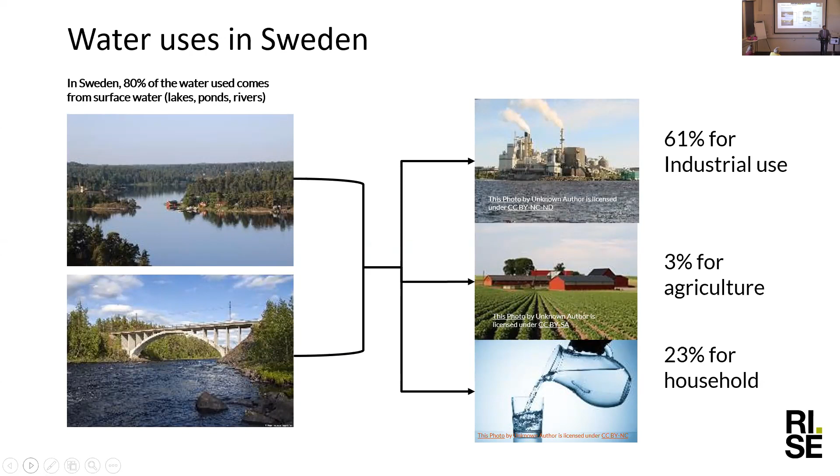And if we compare this with other areas in the world, we'll see that Sweden is the area with the biggest usage of water for industry - more than Northern America, more than Europe. And compared with other countries where agriculture is a lot more important, that also means it will not be the population, it will not be the agriculture that should drive the question here in Sweden. It's the industry that has to do something.

As you probably know, water is not everywhere. So when we speak at country level, that doesn't mean that all the country has the same amount of water. There are dry areas in Sweden, and there could be some local issues, even in such a rich country, let's say in Sweden.

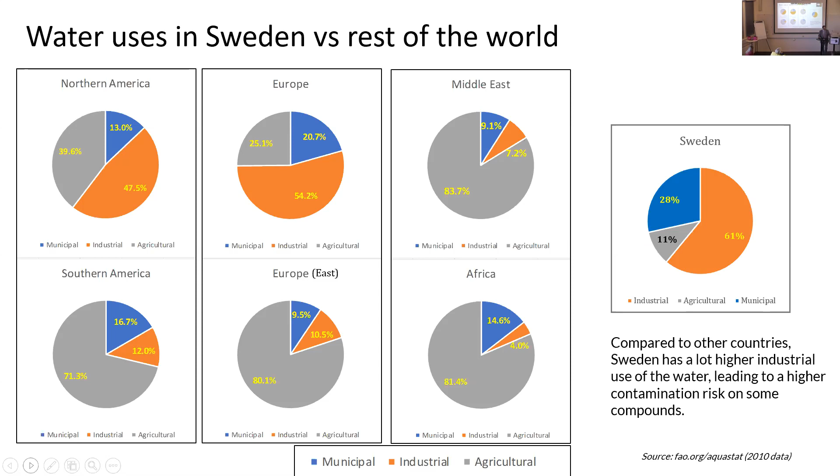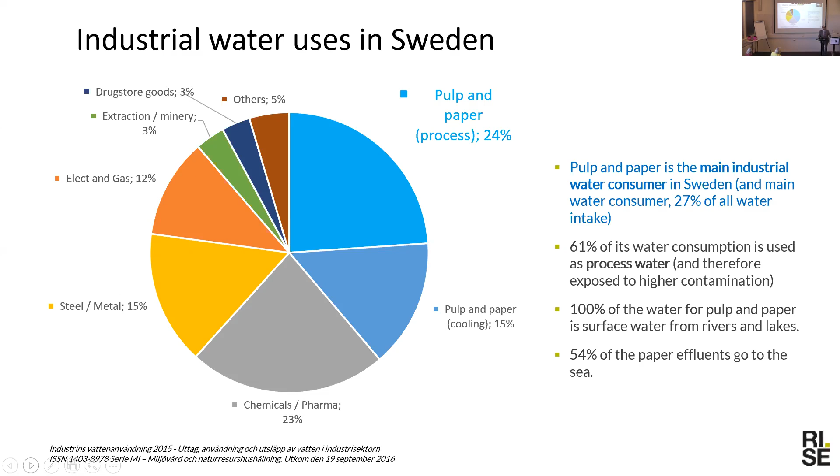And that's what I will try today, trying to simplify the concept to explain how maybe this can be done, and how we together—and when I say we, I speak about the water treatment companies, the research institutes, the paper mills—we have to work together on that.

What has happened if we look at the paper industry in Europe? Between the 90s, there was a huge effort. I'll explain this graph slightly—what we see here is that the production of pulp and paper increased extremely, but the water consumption was decreasing.

So until 2006, there was a big effort from the pulp and paper industry to reduce water consumption. But what has happened since 2006? There was a big paper crisis in 2005, 2006—printing paper saw a big decrease, so production was not increasing. But it seems that the efforts on saving water were not continuing either. It was like we pressed the pause button, and for more than 10 years there has not been a clear, or at least a visible, effort in saving water in the pulp and paper industry.

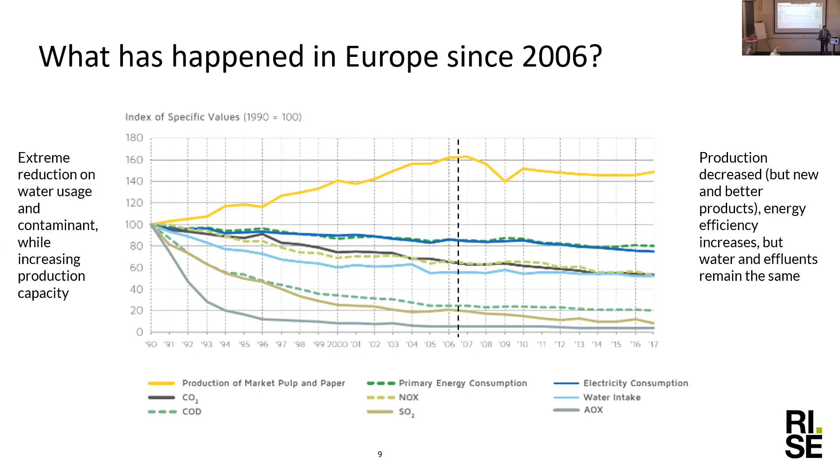Why is that? How can we change this? First of all, we have to understand the needs. And when we think about the needs, it's not only the lack of water or the drought—it could also be problems with incoming water quality. We can also think about seasonal variations that can mean that at a given moment your incoming water is changing a lot, or changes in legislation.

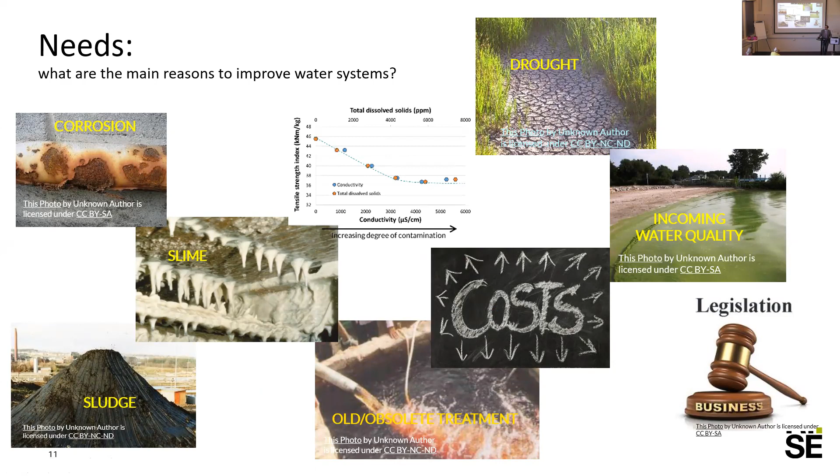We were discussing this during breakfast—a change in legislation can come suddenly and we are not prepared for that, and that's when urgency comes and maybe some bad decisions are taken. It could be costs, efficiency of the processes, or other related problems like corrosion or slime, which is well known in the paper industry. It could be that the water treatment plants are obsolete, or also the sludge—every time we speak about water, we have to think about the sludge, about what will happen with the rest of things.

But then we go to our customers at the paper and pulp mills, and they don't want to speak so much about water directly. Water is more a problem for the environmental guys. So how can we speak with the production manager? How can we speak with the deciding people about water and what they have to do?

So first of all, we want to understand what are the costs of water. The first cost is directly linked to the water—we call it the water usage and water usage cost. That means how much you pay for treating your water, how much you pay for the water you take, how much energy is directly linked to water. So those are costs that are relatively easy to identify. But what we will see is there are a lot of water-related production costs that have to be identified in order to capture all the costs that are really linked with water management.

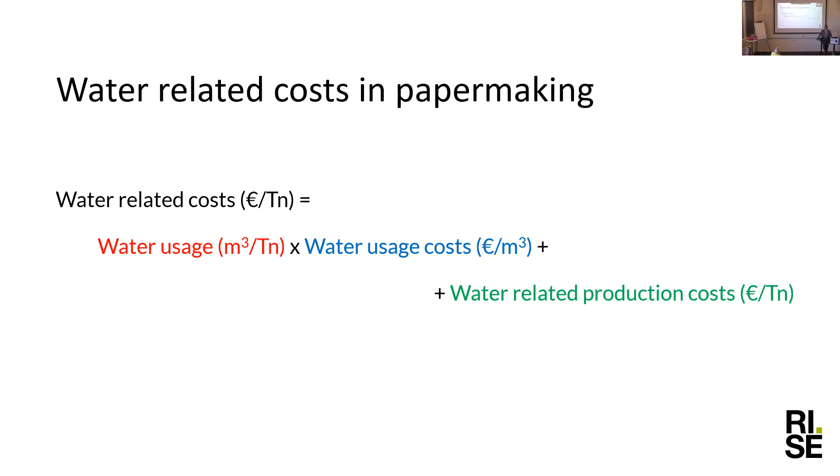So we want to change the perspective a bit. Many times we speak about the specific water consumption or the amount of effluent, but now we have to see how water is used in each of the different units in the process. That is where we have to understand the cost.

Going and defining at the different levels, there is one thing that surprised me a lot: the concept in Sweden that water is free. First of all, the surface water is shared with agriculture and with the cities, so that doesn't mean there is free water for everyone. Every drop of water the industry takes from the surface water could be used for something else. Secondly, even the fresh water is not so clean, so we have to clean it.

So already from the beginning we are adding several costs. I had an interesting data point from the UK paper industry, where the cost of freshwater treatment and effluent treatment can go up to 15 pounds per ton of produced paper. That won't be the biggest cost, but now we're speaking about some real figures.

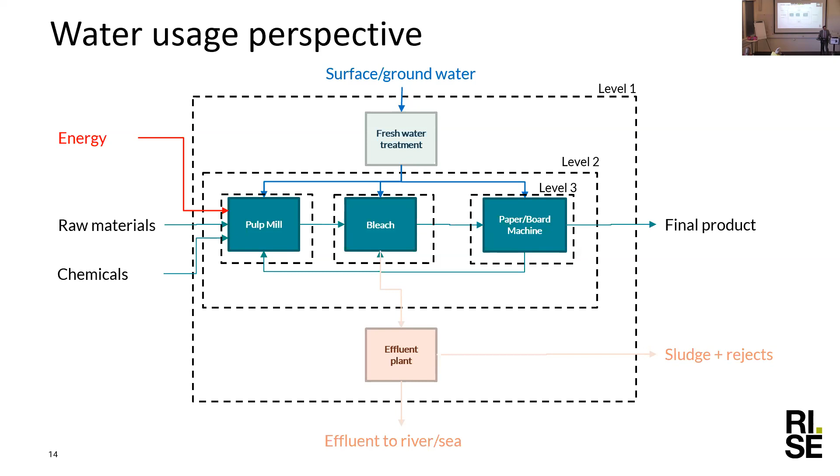As I said, the water-directly-related costs are easy to identify. Let's try to go to the non-visible costs. The first thing I want to discuss is the chemistry - what happens when we reduce the water consumption, for any kind of contaminant you choose. You will always get an accumulative effect.

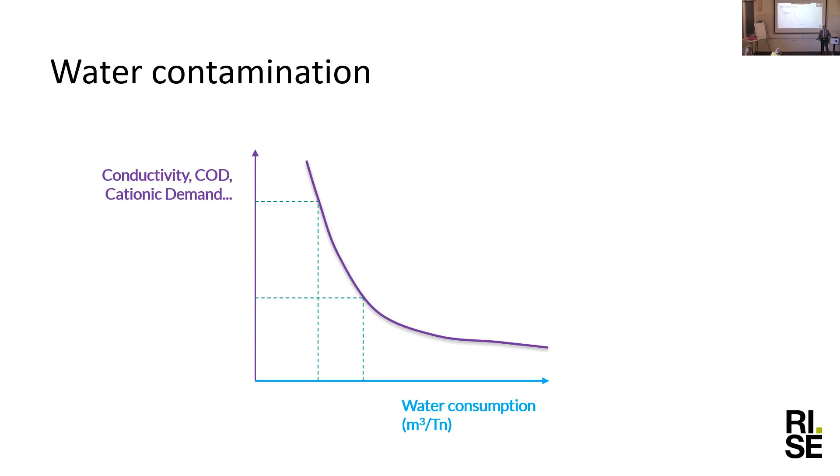That means we will normally be operating at a given level, but there will probably be a maximum that can be achieved. So we will have one curve for each different contaminant.

What is driving this curve in pulp and paper making, and what defines the maximum we can achieve? Normally these curves depend on the pulp type, the water quality, and all the additives we are adding during the process. So it can be sector specific, but it could also be generalized, and we can find some of these correlations. But that will not be enough to convince people.

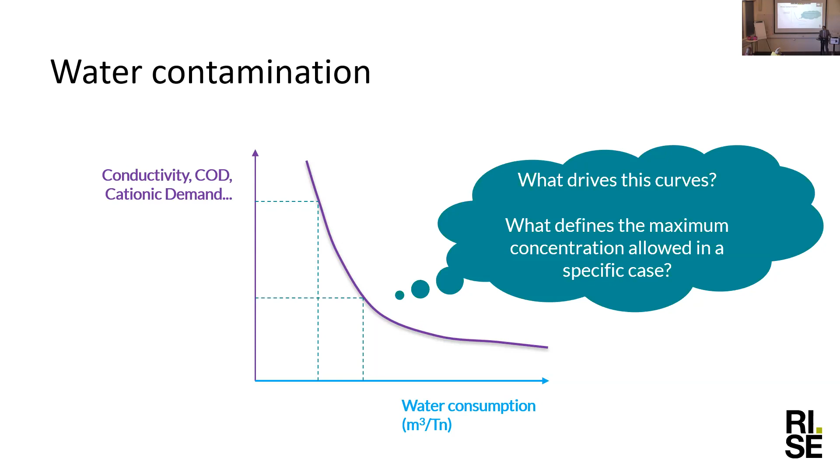If I go to a paper mill and start speaking about COD, maybe I cannot manage to get their attention. So let's take these contamination parameters to the x-axis, and put process-related problems on the y-axis.

We can speak about the consumption of a chemical, the risk of precipitation in a refiner, or the time needed for dewatering and therefore the productivity. And therefore we get a given curve. These are completely invented curves, so please don't take this literally - what's important is the shape of this curve, and what determines its levels.

Then we move closer to the process itself, to the equipment itself, and that's when we need input from the different partners and stakeholders in the water industry. That's where we think RISE can add value - we know about water, but we are not selling technology or any kind of treatment. We know about the papermaking process and the pulping process, so we can understand the impact of a given degree of contamination on the process itself, and make these links to create these curves.

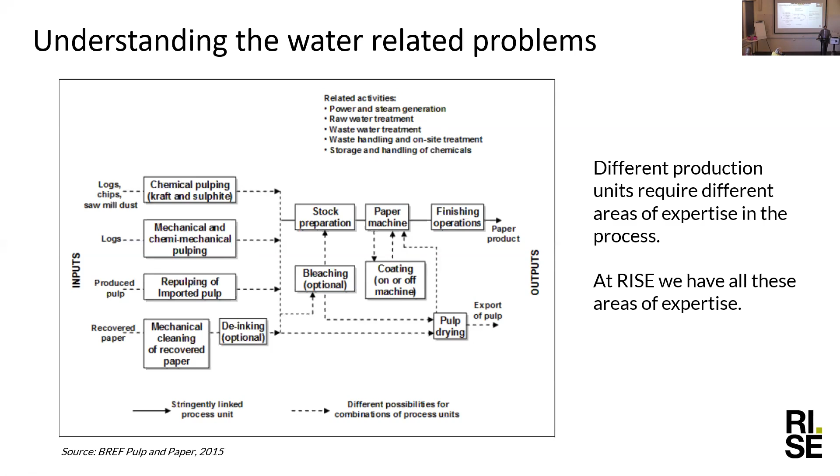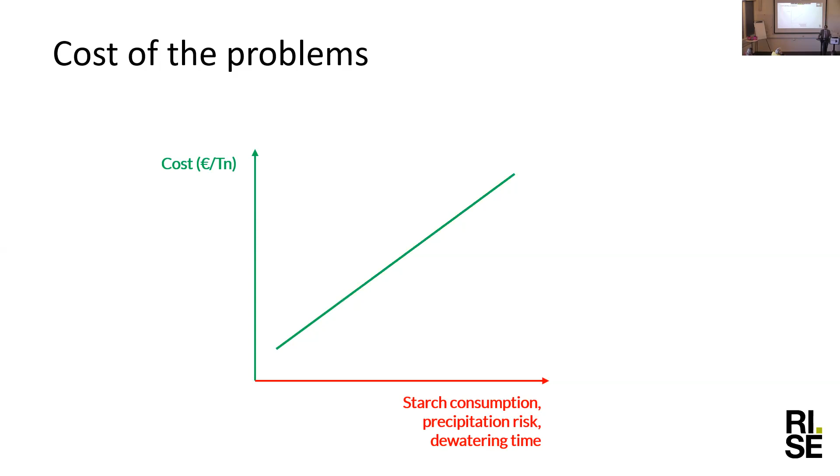The third curve, which maybe isn't for us to define, is when we take these problems and relate them to cost. That's probably more on the mill side, where they can make this connection. But often it's quite a linear relationship - the more problems you have, the higher the cost.

So the exercise will be simple. If we take the three curves we've been discussing and put them together, we can define the production cost related to a given degree of water consumption. And if we take these two levels - that's where we are normally working, and that's the maximum.

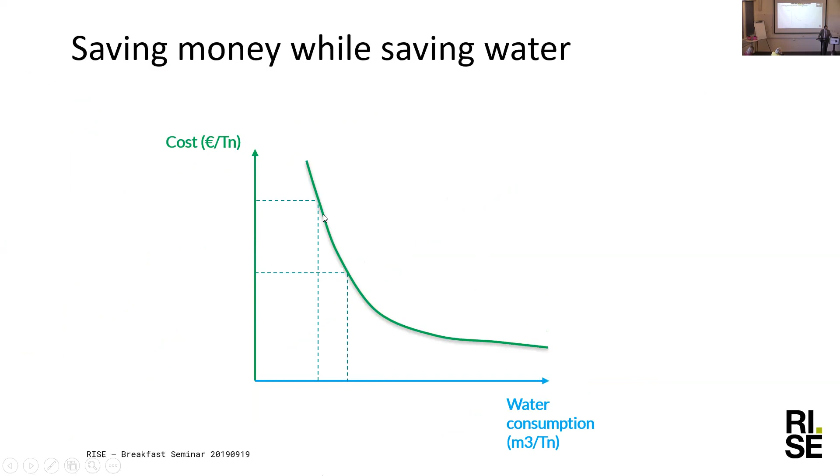What will happen if, by cleaning the process waters, we can get to a different curve? Then we can save money for the same water consumption, or save water for the same cost, or do both. That's the title of the presentation: saving cost at the same time we are saving water.

I wanted to add one additional parameter that is very important to consider as a cost in a paper mill. Normally when a mill is working, the machine is clean, and as the production process advances, we reach a level where we need to stop the machine to do a cleaning or something else, because continuing to produce will affect the product quality and the cost.

By changing to another curve, by decontaminating the circuits, we will also increase the time it takes to reach this level, so we can even increase the production runs. There will be an additional benefit from this decontamination process.

How can we do that? I will go back first to the other curve, because now it will be, we can say, mill-specific or case-specific. It can be a factory with a very high water consumption, and they will feel that they are quite far away from the benefits you get here.

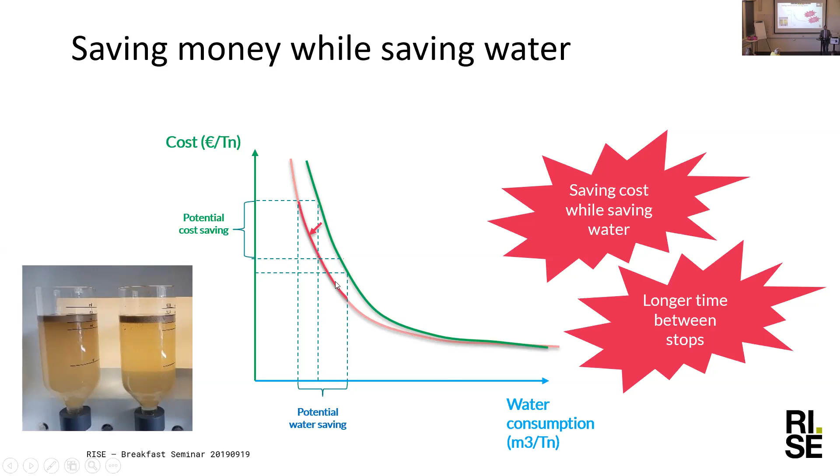But we have said already, considering we are in the 21st century, that sustainability is a must. We cannot allow, as paper industry, being the maximum individual water consumer. We cannot accept staying here, but we need to show the right way to move up to this curve with the minimal impact for the factory. As I always say, we cannot start building the house from the roof. There are some steps we have to do before thinking about decontaminating.

We have to use the right amount of water in the right place. That's what we call water management, understanding the quality. Then we have to start closing the water loops, which are opportunities to directly reuse the water. Only then is it time to think about internal treatments. That's very logical, because water treatment cost increases exponentially as we go to higher needs, so it's nonsense to install internal treatments directly when we have to treat twice the amount of water.

Just a comment: this graph is a real case scenario from Holmen Paper in Madrid.

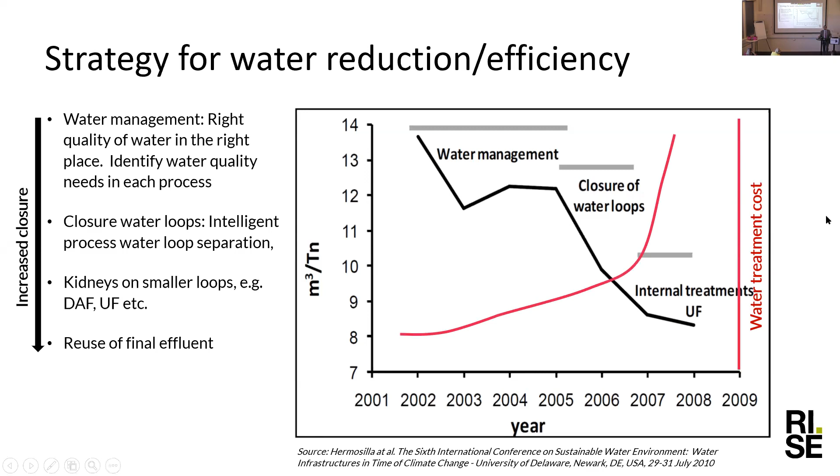That's what we want to suggest as a strategy, and as we said, not only for this, it's a strategy, a mindset for the industry. First, take water quality management, defining the problem, identifying the specific risks in the different operating units, characterizing and understanding it. Secondly, rethink the process, rethink the water loops with the help of simulation tools, to evaluate the potential of the different alternatives we have. And finally, test these curves.

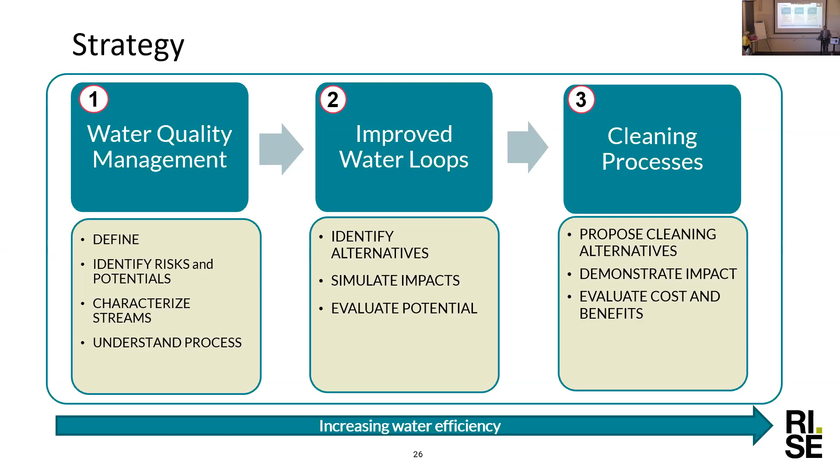But thinking about this accumulation curve, that's something that can be done at lab scale, at least to identify the potentials. And then is when, and I give the word to my colleague from IVL, we need the water treatment companies to make this feasible.

In my experience, since 2006 there was very little effort, but that's not the case for water technology. There has been a lot done on water cleaning during these years, which means that what was economically unfeasible maybe in 2006 now looks quite different.

So we really need to show that it's not only possible to clean the water and that cleaning the water leads to benefits, but also that cleaning this water is not as expensive as we tend to think. Thank you very much.

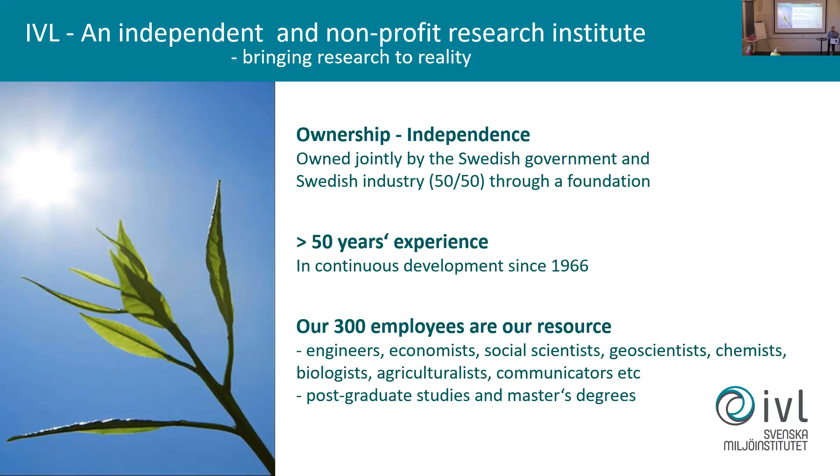And also we work quite intensely with EU projects. I'm a coordinator of one Inspire Water project that also aims to save water in the industry, and we are working in this case with Sandvik.

Why do we go abroad? Why do we try to? Because we think, to be true, on the global scale we are a really small country. We are half the population of the biggest city in the world. So our chance to make impact is to try to be in the front and show that it's possible to do developments in the environmental area. And that's also true for water. Even if we have a lot of water, we could make impact by showing how we could reduce the consumption. And if we are successful, there will be a huge market for those technologies and systems. So we should try to be in the front.

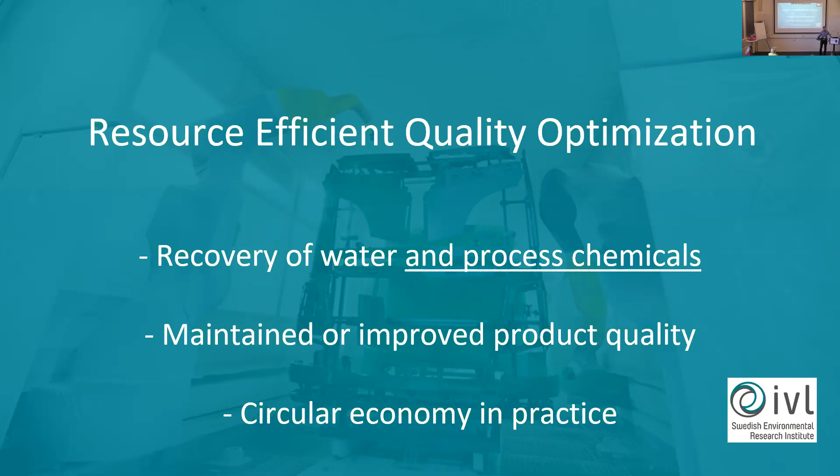So today, very often you see abroad, but in Sweden we have started to go more close to the processes. In the beginning, when we started at IVL in the 80s to introduce separation technologies, we found out that if you go end of pipe, after you mix all the effluents and try to bring out the impurities, you will have a very complex water. And that means that if you introduce more sensitive separation technologies, you're going to have problems. So what we learned was that we should go as close as possible to each process in the industry and put the separation technologies into the processes.

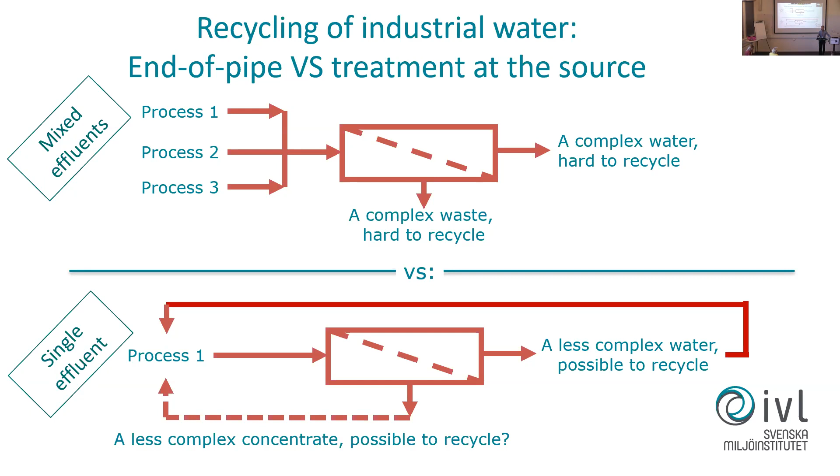And that's true. Here is one example where we have been working with both Scania and Volvo in different projects. Phosphating is a process where you take the steel plate before you paint the cabin or the car. You have to clean the steel plate, and you have to introduce a phosphate layer that is a corrosion inhibitor, but also a very good surface for the color, for the paint. That's what they do in large processes all over the world in the car industry and truck industry.

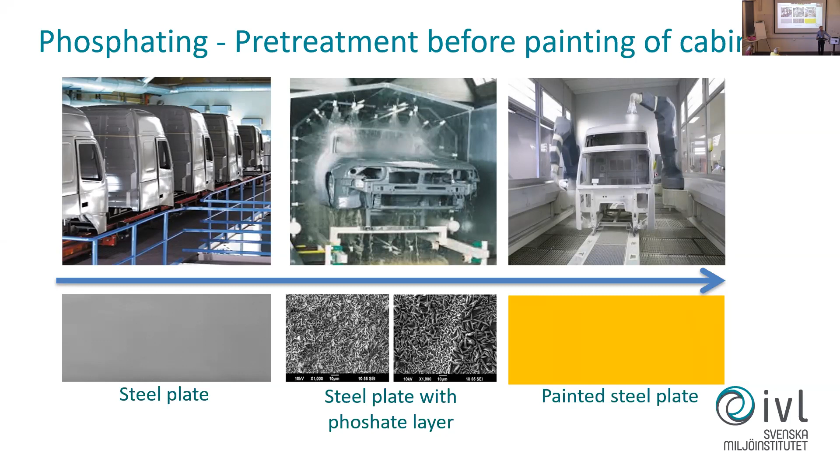This is a quite complex production process. You have degreasing, phosphating, passivation, and a huge amount of water spent in this, huge amount of chemicals and big volumes. It's similar to pulp and paper, even if they use even more water. But you should also be aware that there are many different single process steps in this process, and each of them correlates with each other. What happens in the beginning of the process line will affect the process also at the end of the process line. So therefore you have correlation that is quite hard to understand, between the process bath chemicals and the product quality.

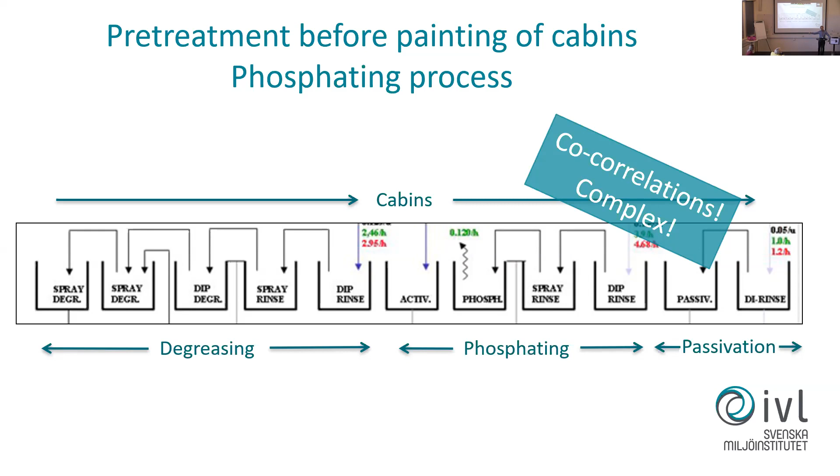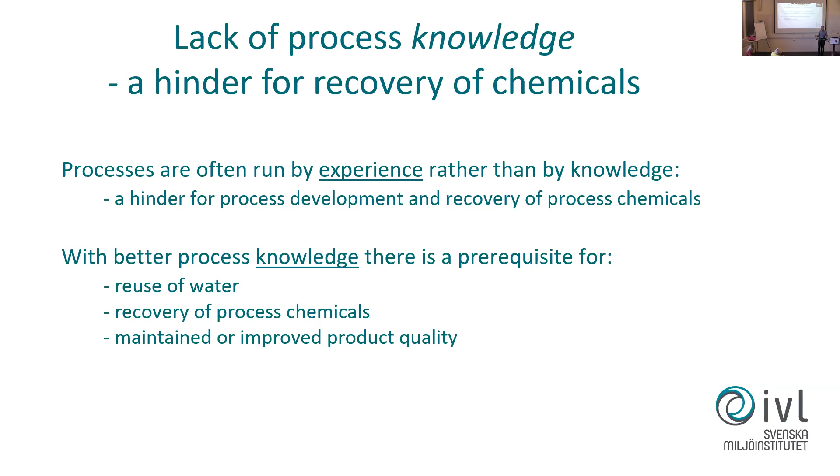When we introduce this way of thinking, you very often meet resistance: 'No, we have total control of our process. We know which pH we should be in between, we know which conductivity we could have in the different process baths.' We have very good control today, but that's learned by experience. You have learned where you could be in the process, but if you want to start to recover water and chemicals, you have to have knowledge about your process. That's the hinder why the quality manager or production manager are not very happy to start recovering chemicals and water, because they think this will change their process quite a lot. So we have to overcome this.

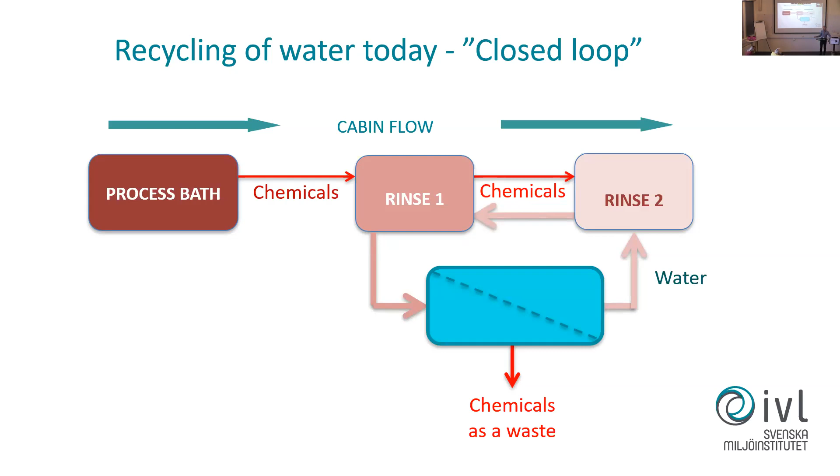Today, introducing water recovery processes is quite common in Sweden and in Europe. You have a separation technology, for example at the rinse waters, to bring out the impurities. But then you form a waste containing the impurities, which also contains the process chemicals. So you form a waste of your process chemicals along with the impurities.

So what do you want to do? Why form a waste of those process chemicals? Why not go back to the process? The main resistance lies in being afraid that you will affect the process, that you will accumulate impurities in your process bath.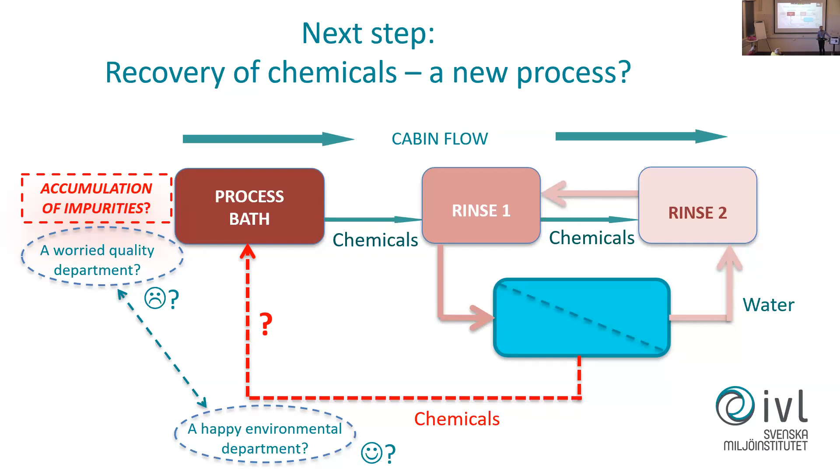To overcome this, we have a resource-efficient quality optimization approach that contains 6 steps. The first is to find the real correlations and learn about the process—find the correlations between the process parameters and the product quality. You have to learn and understand this, not just use the limits you're running today. If you're successful finding those, you should be able to predict the product quality by the process parameters.

But you also have to take control of the mass balance of your system. Very often you don't really have good control—you don't know really how the process flows go. Then, once you know through this learning process what's really important for the product quality, you should learn how to take away the impurities from the process bath.

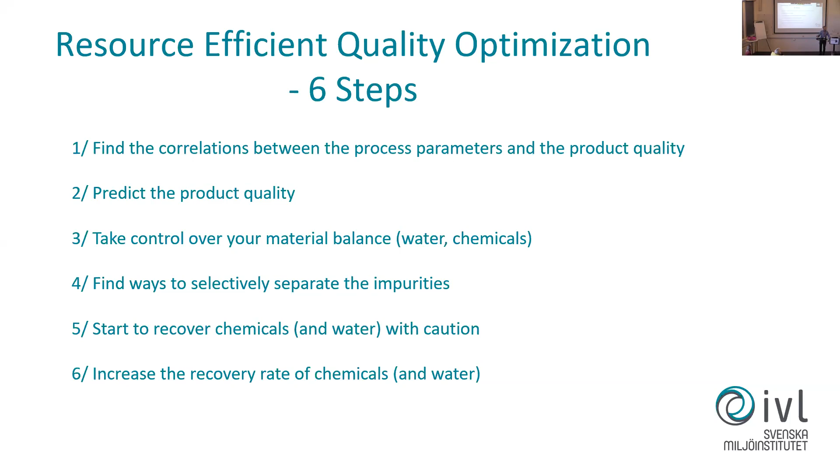Then you could start to recover water and chemicals, but with caution—not just start up this process, do it carefully, and then increase the recovery rate stepwise.

So how do you find the correlations between the process parameters and the product quality? You use multivariate analysis. We have a department working on this, and we also seek cooperation with RISE, because we might be quite good at recovering water, but we also need knowledge about the processes, for example in the pulp and paper industry.

We need to sit down and discuss these with the companies and the experts. What do those graphs mean? What are actually the real impurities in what we find out from the multivariate analysis?

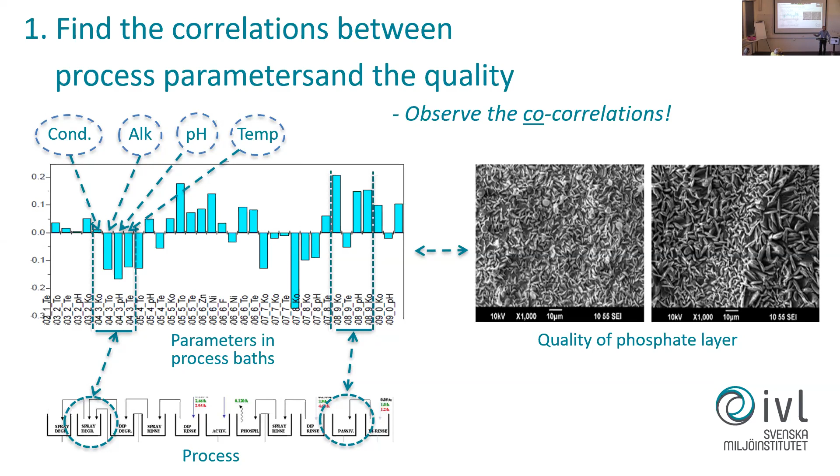And then if we find those correlations, we could predict very nice relationships between the process parameters and make a data model. Then you could, in real time, find the product quality of the products.

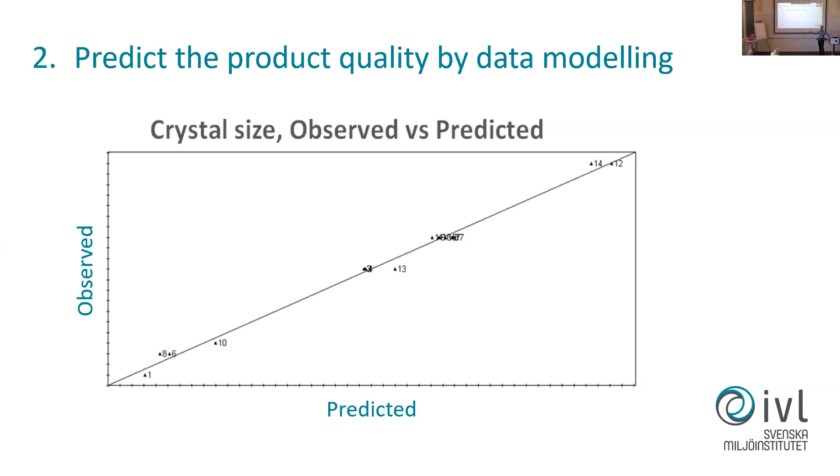But if we introduce systems that predict the product quality, you could have it in real time. This is also interesting: if you're not very successful predicting the product quality, you'll see outliers. This means you don't collect the data that's actually affecting the product quality, which is also very interesting—you have to start to understand what is actually affecting your product quality.

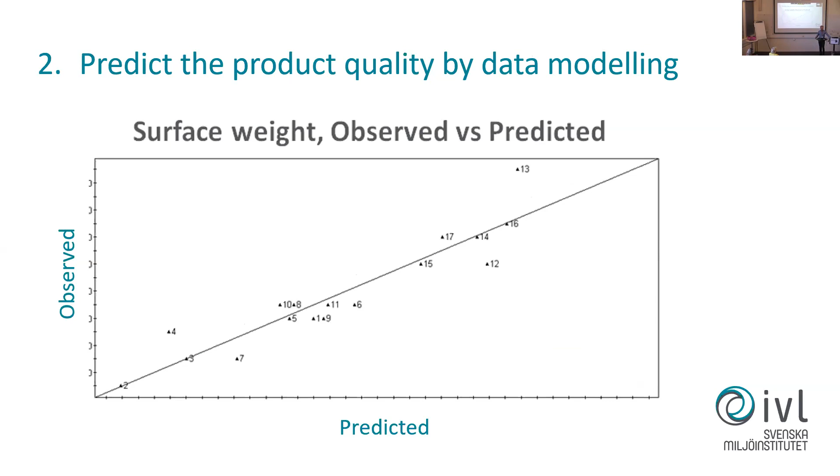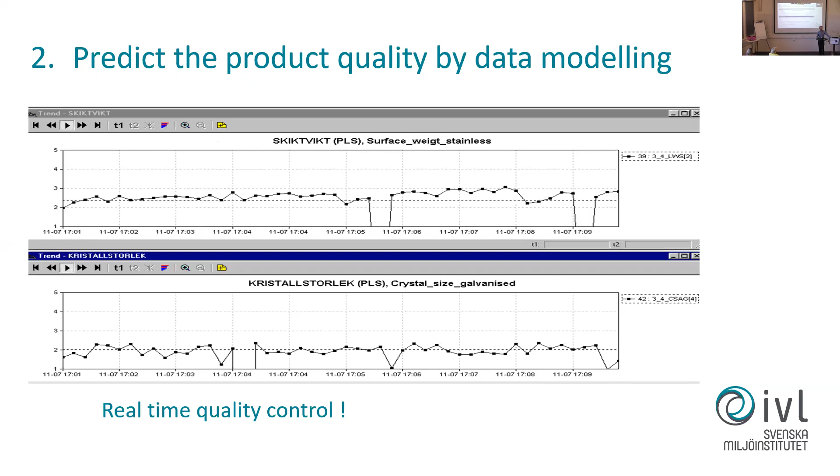Once you learn this, you could put it in a data model and analyze continuously. You could also have the product quality continuously shown in a graph, and then really have good control over the process. You also should have good control over your water and the mass balance of chemicals.

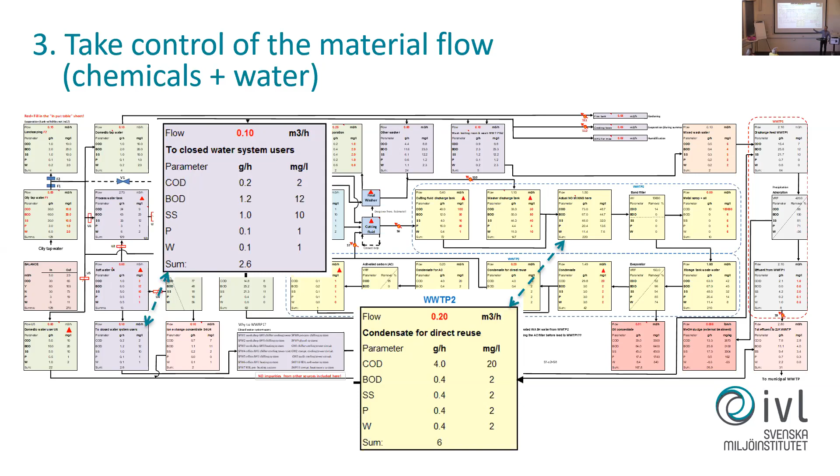This sounds very obvious and simple, but if you go into a process, you will find that maybe someone shifted the water valve, so that water doesn't go this way anymore. You think you'll accumulate a lot of chlorides here, but actually it depends on another thing than you thought. You will learn a lot by going through the process in detail and discussing it with the process engineers.

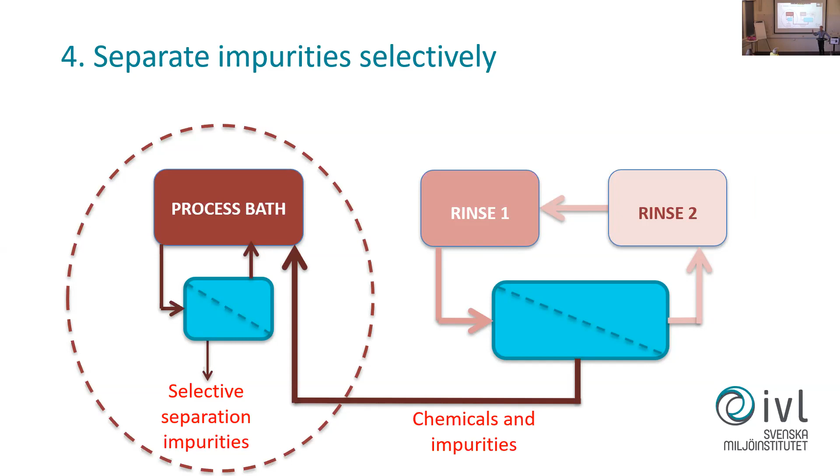When we know what actually had to be taken out from the process selectively, you could start to do that and learn how to do that by introducing separation technologies and test which one works together. Very often you have to combine some separation technologies to be successful.

Then you have the system, you know how to recover water and chemicals, and you have good process control. What happens in the process, you will follow in real time. And then the quality department will say, yeah, okay, let's have a try.

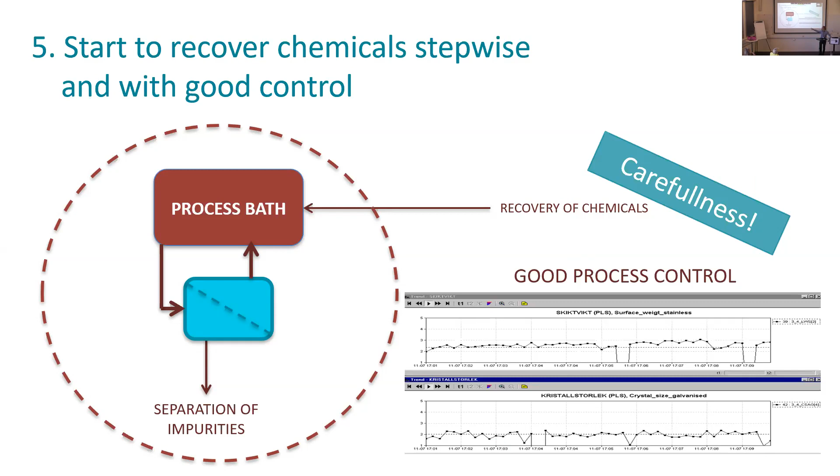And then you can start to introduce those closed loops. After a while, you'll see that the product quality is stable, and you could then start to introduce full scale recovery of water and process chemicals.

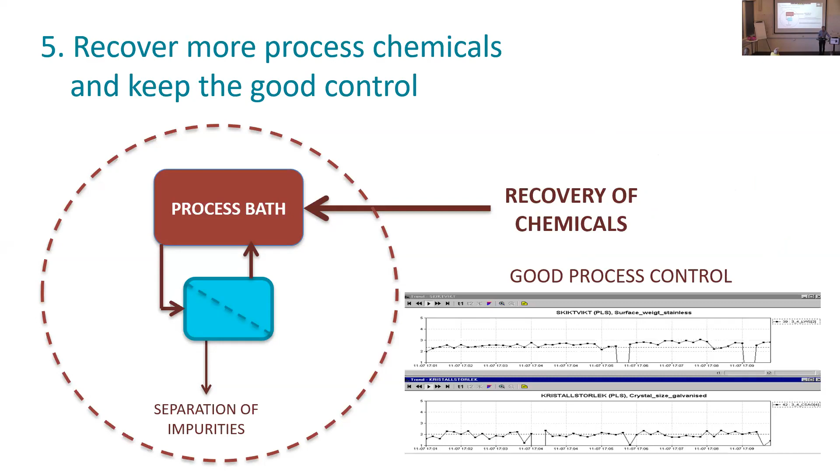So by using this strategy, resource efficient quality optimization, you could recover both water and process chemicals. You could maintain or even probably improve the product quality at the same time. And this is really a circular economy in practice when you run such a project. Thank you very much for listening.

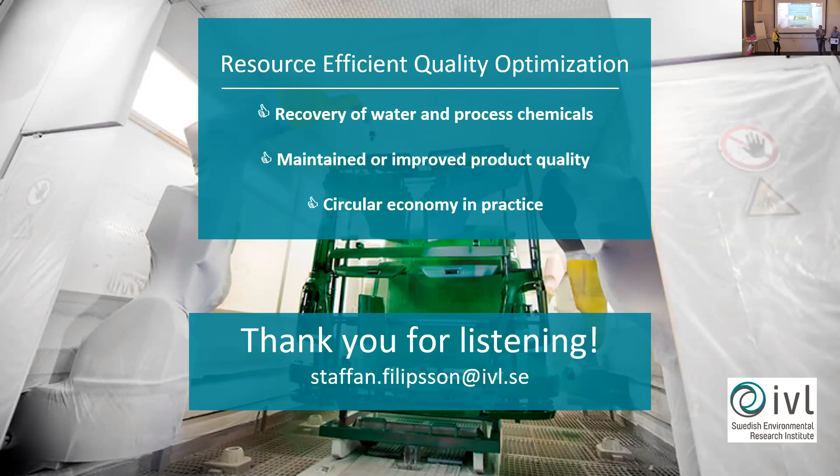Can I add a comment? I think Staffan has raised an important topic we often forget: the cost of lack of stability, the cost of lack of quality, and how in many industrial processes we sell over-quality because we are not able to control it. I always use this example: water is like the blood in a body. It has to move the good things where they have to be and remove the bad things where they should not be. It's the key parameter for stability in a process. If you have a break in the paper machine, you lose 2 hours of production until you're back again. What is the cost of these losses? So when you ask what the benefit is for Volvo in doing this, suddenly you are in control, and you avoid selling that extra 1% you shouldn't be selling, which is lack of profit. So it's very important to keep stability, with proper water management and a proper understanding of your process and what is really driving the quality. It's important for the paper industry, the car industry, or really any kind of industry.

I like that. I also remember one thing you said in your presentation, that there's a combination of experience and competence, or experience and knowledge, which is an interesting separation. I'm looking forward to seeing more about this.

Do we have more questions in the audience? In that case, yes, question, yes. Okay, I don't need the box.

What was the reason why Volvo-Scania, for instance, were chosen to get your help? What was the main reason? Financial or economic impact, or environmental impact? Repeat the question. What was the driving force for Volvo and Scania and those companies to get into such projects?

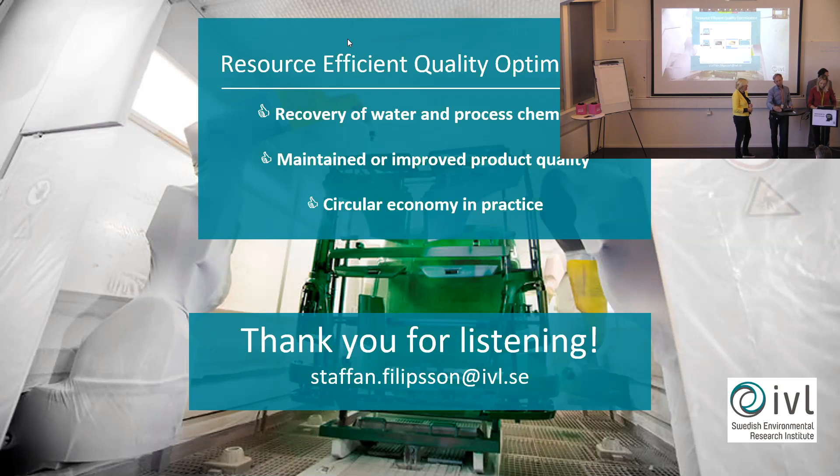I can't remember the start of the projects really, but I think maybe from the beginning they wanted some help with the separation technologies, since we are experts in that. Then we said that maybe if you run such a project, you should also look into the possibility of not just recovering water and reducing water consumption, but while doing those projects, why not take control over your processes and improve your product quality? We could run a bit more extended project, and they thought it sounded good.